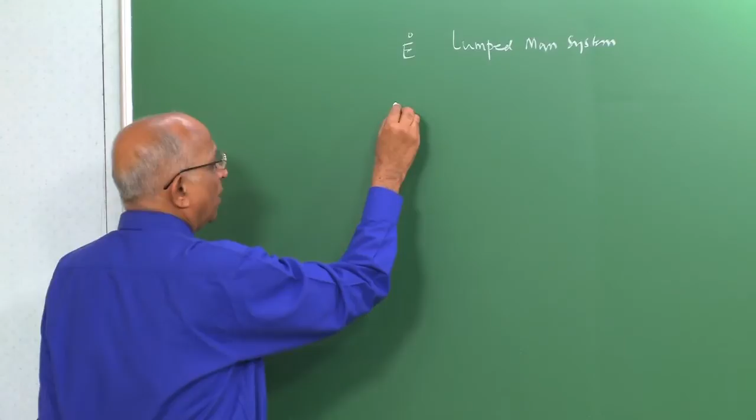In this context, let us restate what we have been saying all along. In the lumped mass system, we said the temperature is uniform throughout, concentration is uniform throughout. We assume all events to occur uniformly in the spatial domain at all times. Well, this just may not be possible.

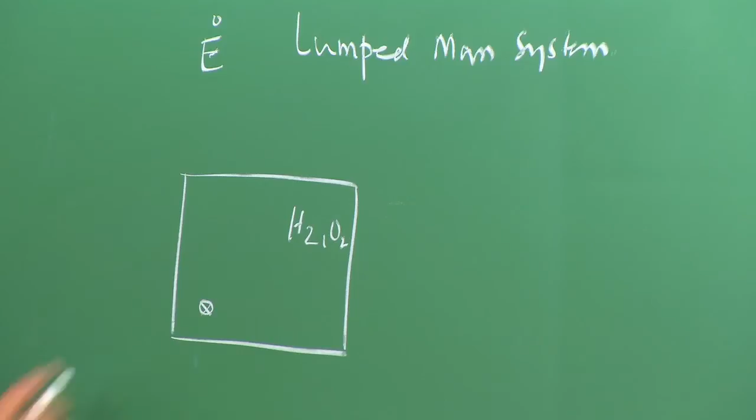We again go back to this example of a hydrogen-oxygen mixture. Let it be at a pressure of 1 atmosphere, initial temperature around 300 Kelvin, and I deposit some electrical spark or some energy in this particular small volume. It is not that the entire volume is going to explode like what we assumed in the lumped mass system, but from this source of energy released, this energy heats up the neighboring volume, and so on. A zone of chemical reactions propagates out.

Let us take a small look at this. Let us expand this particular portion and sketch it. In other words, I have a small volume, now shown magnified, in which I deposit some energy, corresponding to an electrical spark or some resistance heating, or a matchstick I put over here to heat the gases.

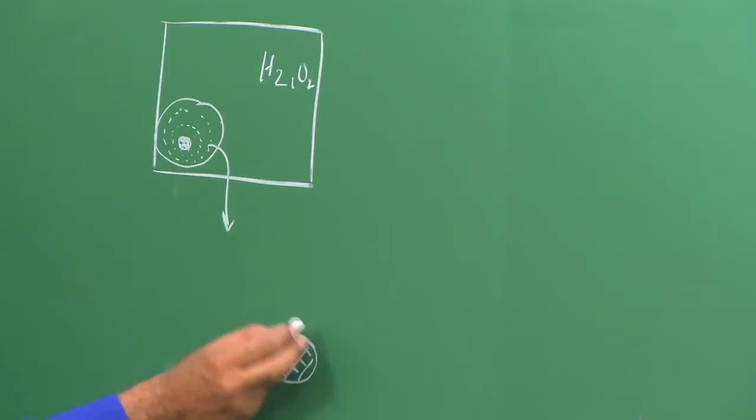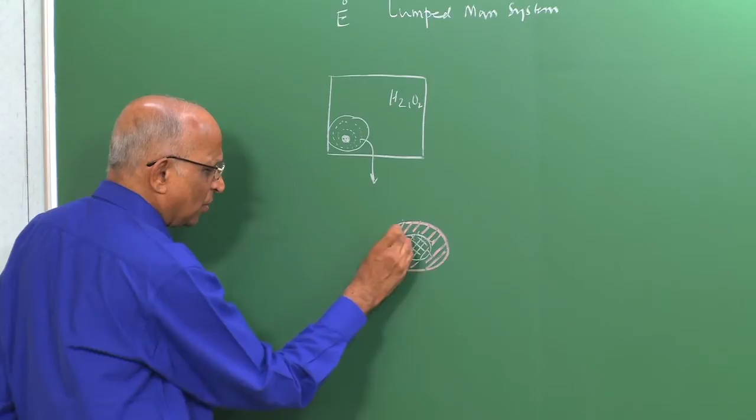What happens? The moment this volume gets hot, chemical reactions take place and the temperature goes up further. This gas heats up the neighboring gas around it. In a zone which I now show in pink, the neighboring gas gets heated by the chemical reactions and heat generated in this small volume, and the heat and concentration diffuse out, causing a chemical reaction in the adjacent layer.

And now what further happens? This adjacent layer, which is hot and undergoes chemical reactions, heats up the next layer. The adjacent layer to the one previously heated now gets heated by heat transfer, conduction or convection from this pink zone, and chemical reactions occur in this particular zone, which thereafter further heats up the layer around it, and so on.

So what is happening? This zone heats up the zone adjacent to it, and in this way, from this initial zone of heat release, chemical reactions occur because of heating. It causes chemical reactions in the next layer, and the next, and so on. You have chemical reactions propagating out from this zone of heat release, till it fills the mixture.

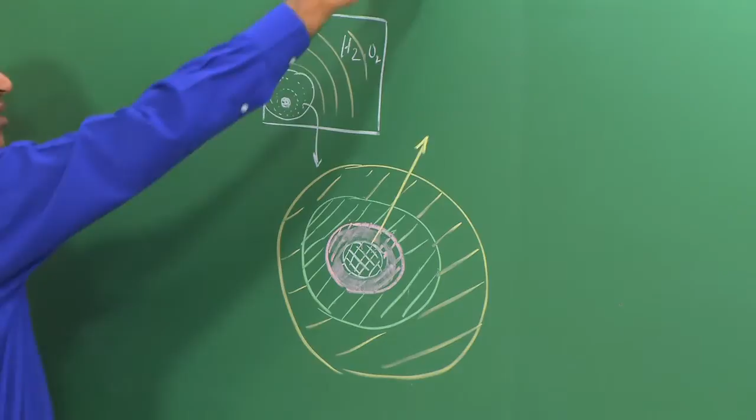Therefore, it is not that instantaneously, as assumed in the lumped mass system, everything is uniform, but it is going to take some time for it to propagate out. This is point one. Point two: let us take a look at the energy release itself.

Suppose this volume is very small, and the amount of chemical reactions it produces is small, such that when it heats the next layer, it apparently is going to get cool because the heat passes on to the next. This hot zone becomes cool if the volume is insufficient, or if the amount of energy or chemical reactions here is insufficient to maintain its temperature as it heats the next layer. What is going to happen?

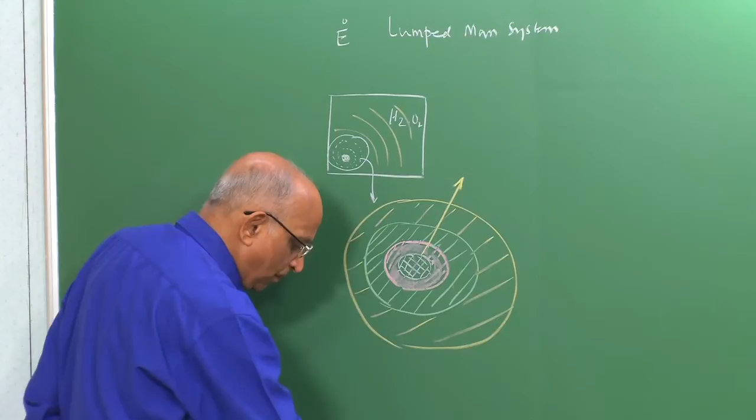This initial volume, shown something like this, the amount of heat in it will collapse, or the temperature will decrease, chemical reactions will decrease, and by the time the neighboring element gets heated up, it is inadequate to heat the neighboring element and it collapses. Therefore, the spark or the chemical reaction collapses, and I can no longer get combustion occurring in the neighboring layer. So we say, if I use a spark for igniting a mixture, unless I have an adequate quantity of this particular volume, or let us say by volume I mean something like a kernel, something like a seed.

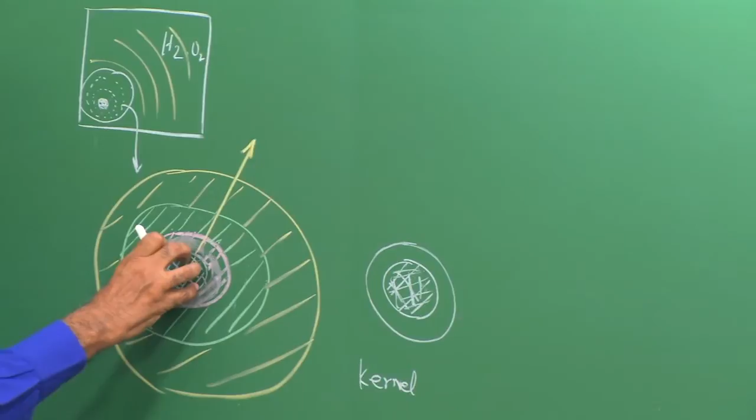If I do not have an adequate kernel for ignition, the ignition kernel will collapse and it will not be possible for it to heat the adjacent layers. Therefore, from the ignition point of view, it is necessary to make sure that the size of the ignition kernel exceeds some threshold value, and this is what I want to do.

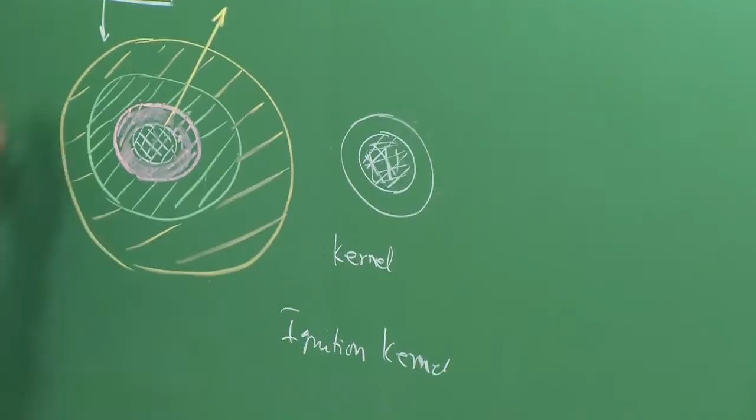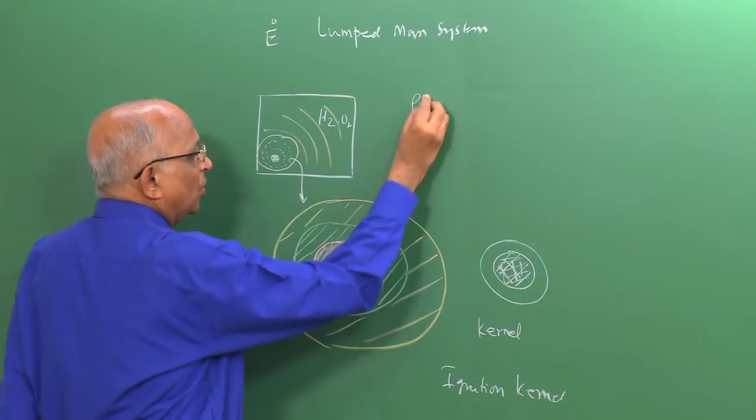I want to find out, since I am not heating the whole thing, that I don't need the total mass in this system, which is rho times volume times specific heat times the high temperature (the burn gas temperature minus the initial value, where the initial temperature is the same as ambient). I don't need to supply that amount of heat, I just need to supply the heat required to form an ignition kernel which can heat the succeeding layers.

This allows the combustion wave to propagate out. But to find the critical size of the ignition kernel, and therefore ignite the gases and have a flame moving out, it is necessary to get some idea of the rate or speed with which the combustion wave moves. What do you mean by combustion wave? It's the zone of the reacting gases, and in that zone the temperature increases. We need the speed at which this zone moves out, the thickness of these zones, and some more definitions before I can determine the ignition - and this is what I do today.

Having specified the problem, let us see how to go about it. Let us first ask: what is the speed at which the combustion zone propagates out? That means the speed at which the chemical reactions are going forward. To do that, let us forget about curvatures for now.

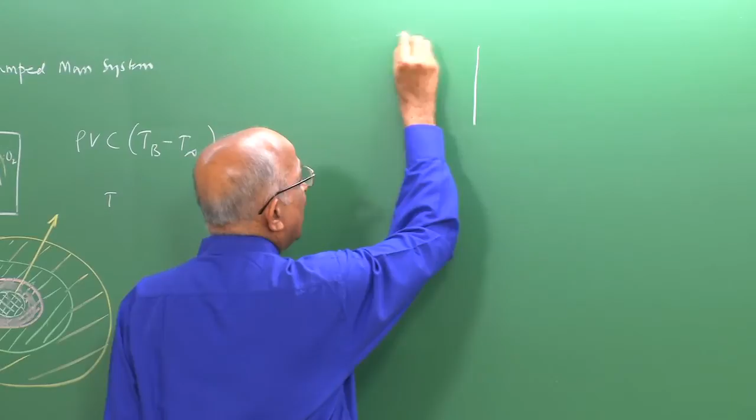Let us say I have a zone of combustion - a pipe or some particular medium in which I have the unburned gases. The unburned gases are at density rho, which is unburned, at a temperature Tu (the unburned gas mixture), and the pressure of the unburned gases is Pu. Into this unburned gas mixture, a combustion wave, or zone of reaction, propagates.

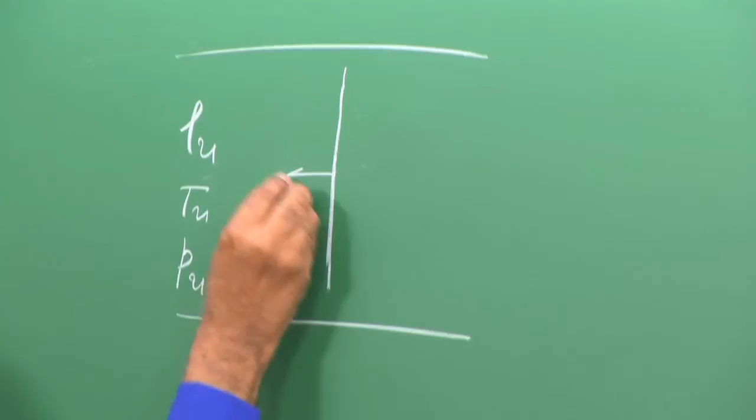Let this zone of combustion, which I now say is planar, propagate at a speed S meters per second into the unburned gases - therefore I can say it propagates at a speed Su meters per second.

What happens behind the combustion front which moves into this? Well, the gases burn behind it, chemical reactions take place, and the density, temperature, and pressure now correspond to the burned gases. So the suffix B for pressure, temperature and density corresponds to burned gases, and the suffix U corresponds to unburned gases.

This is the problem, and I want to determine the speed at which the combustion wave propagates into this medium. As we did before with waves propagating into a medium, to look at the problem with a wave propagating and things moving, when the wave propagates I should have some velocity within the medium - let's say U in the burned gases behind the wave, which is moving at Su.

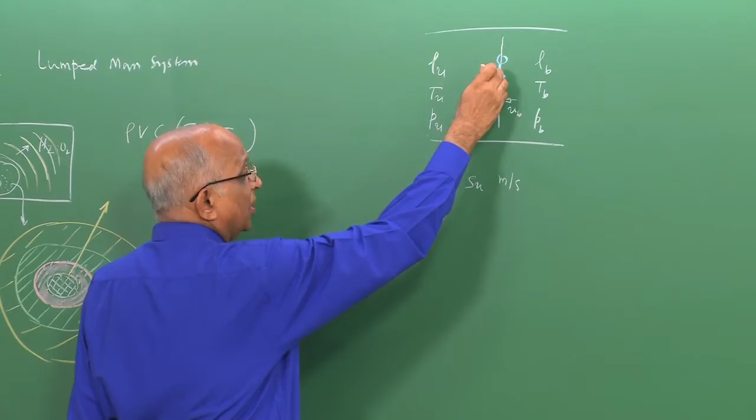It is somewhat difficult to handle this way, so the easiest method is to effect a coordinate transformation such that I imagine I sit on the wave, or stand on the wave itself. That means I look at this problem in the context of the wave being stationary - I sit on the wave and watch the show. If I do that, what do I get?

Well, I have the same problem now - the wave front is here, but since I am on the wave, in the frame of reference of the wave itself (the combustion wave, or combustion front, moving into the unburned medium), the unburned gases at density rho u, temperature Tu, and pressure Pu move towards me - that is, towards the wave in the frame of reference of the combustion front - at a speed Su.

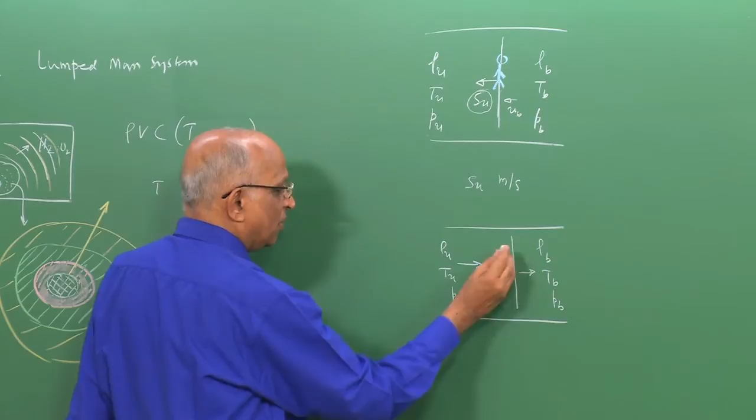Let us assume behind the wave I have rho b, Tb, the temperature of the burned gases, and the pressure of the burned gases. In the frame of reference of the wave, let the velocity be Sb. Well, what am I interested in? I am interested in determining the value of Su. The problem is posed: behind the combustion disturbance which moves, I have these values, and these are the values upstream.

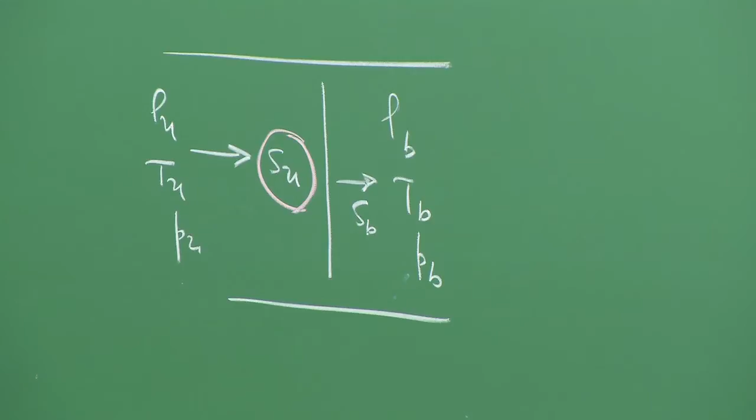But can I picture what is really happening in this wave? What is this combustion front or zone of combustion that we said is moving? We said something gets heated, there is diffusion of heat and diffusion of concentration which causes the adjacent layer to react, and the same thing happens again. This causes the adjacent layer to react, meaning more and more of the unburned gas comes in and gets heated.

Can I expand this out? Can I have a mental picture of what is going to happen? That is what we call a mind model. I want to have a mind model of what is happening in this particular front. Therefore, let us try to devise what would happen.

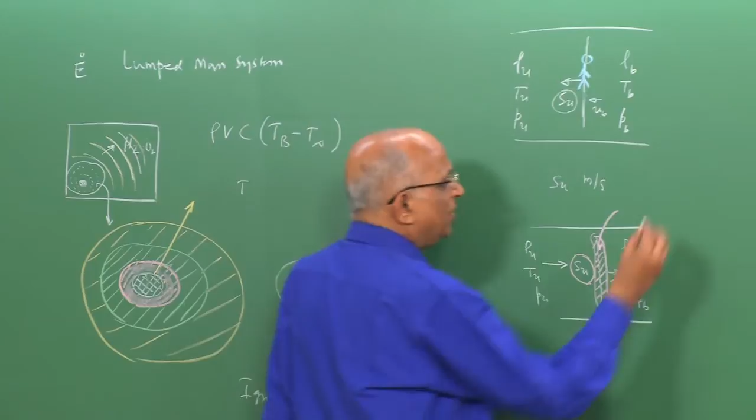We say the unburned gases are moving, so initially I have the unburned gases at a temperature Tu, and what happens? At the exit I have all burned gases. Now let us expand it out and give it some thickness. Initially the temperature is Tu on the left hand side, and on the right hand side the temperature is Tb. What is going to happen?

Into this line, what is happening? I have rho u at speed Su, which is the mass flux entering this zone. The moment it enters at temperature Tu, it encounters the hot products of combustion on the right hand side, so it gets heated and the temperature begins to increase.

The temperature begins to increase, and where does it end up? Ultimately the temperature should be Tb, corresponding to the right hand side. So the temperature T of the unburned gases increases from Tu to a level where chemical reactions begin to take place. Once chemical reactions begin, they occur fairly fast, so the temperature reaches Tb. This is the way temperature changes from the unburned gas temperature Tu to the burned gas temperature Tb.

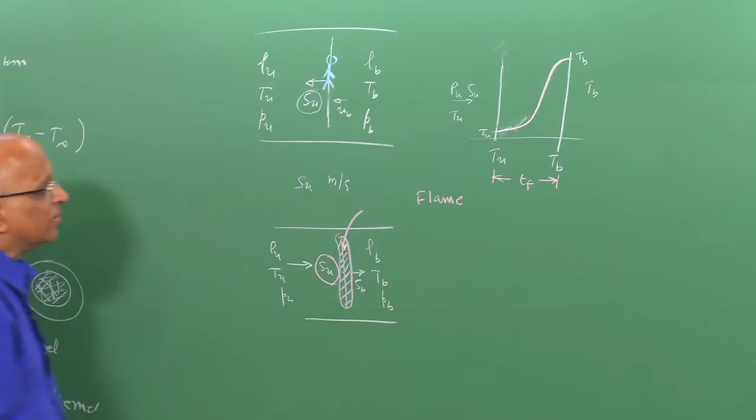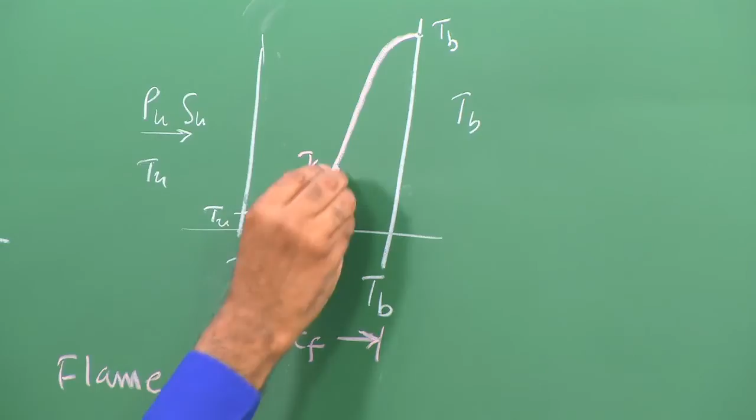Using what we learned from the lumped mass system, we said that when the activation energy for most substances is high, initially there is something like a preheat zone where the temperature increases to some value, let's say Tc. That is the zone in which the cold gases are heated to a particular temperature, which we call preheat. Once it has been heated to the critical temperature, the auto-ignition temperature, there is a spurt in chemical reactions and the temperature shoots up like this.

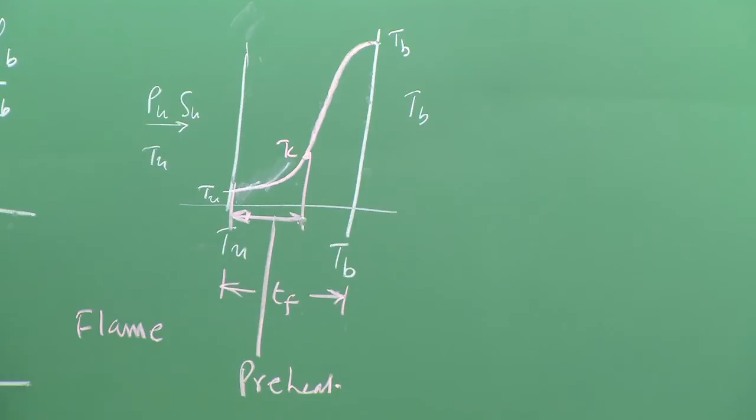So initially there is something like a preheat zone followed by chemical reactions over this length, and now I can add more detail. This is my zone of chemical reactions, fast chemical reactions, which I call L. So the thickness of the flame is Tf, my zone of chemical reactions is L, and now can I write an equation for this particular phenomenon?

This is the zone of active heat release, and this is the zone in which heat is getting received, such that the temperature goes from Tu to Tc. We are talking of a zone in which heat is getting released, and this heat gets transferred into this zone such that it is able to increase the temperature from Tu to Tc.

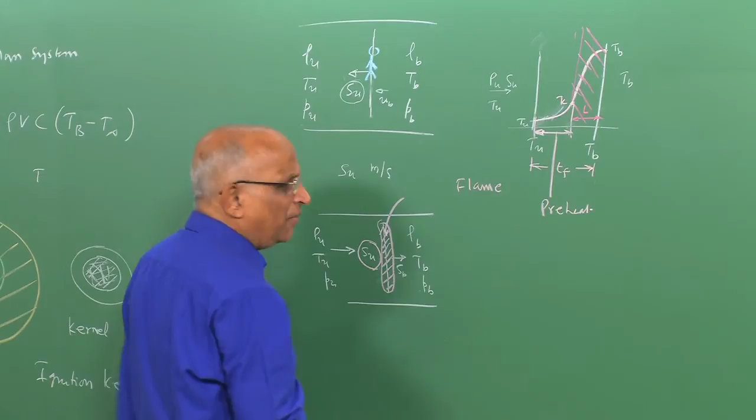This zone, the preheat zone, receives heat. You will observe whenever we receive something, we put our hand out like this, whereas when you give something, you give it like this. So you receive something over here, and give something over here. The point of contact between receiving and giving is what we call the inflection point.

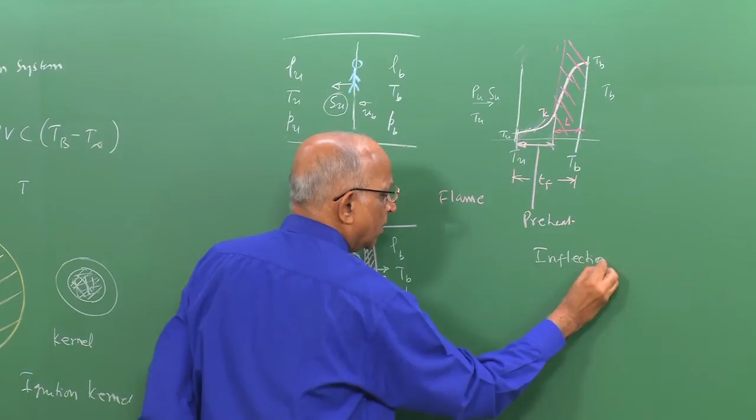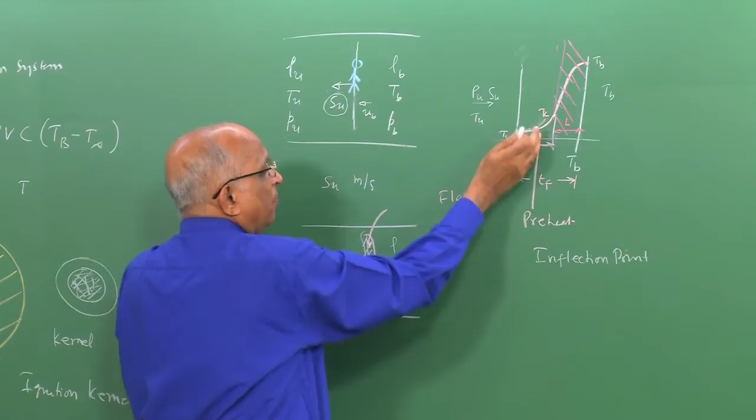The inflection point is a point at which the curve is concave downwards in this particular zone, because it is giving - it is convex upwards or concave downwards - and what it is receiving is concave upwards or convex downwards. So the concave downwards is getting replaced by concave upwards, and that is the inflection point.

That is, at the inflection point there is a sign change in d by dx of dT by dx, wherein x is the distance, and therefore there is a change in the curvature. That is the inflection point.

Rather than carry the concept of critical temperature or autoignition temperature from the lumped mass system, I say the temperature here is the inflection temperature, which is the junction or point at which the heat received from the hot zone is received, and this is what is given. I have the inflection point over here.

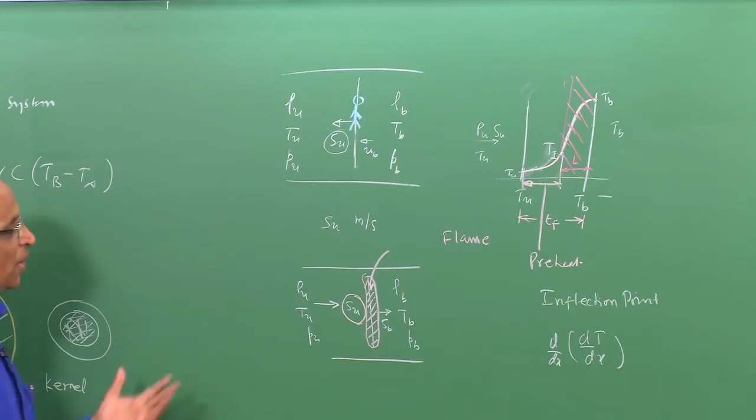Now I know the events occurring along this line, which is what I have sketched. I want to write an equation for it. What is the equation? I have to write the heat balance equations.

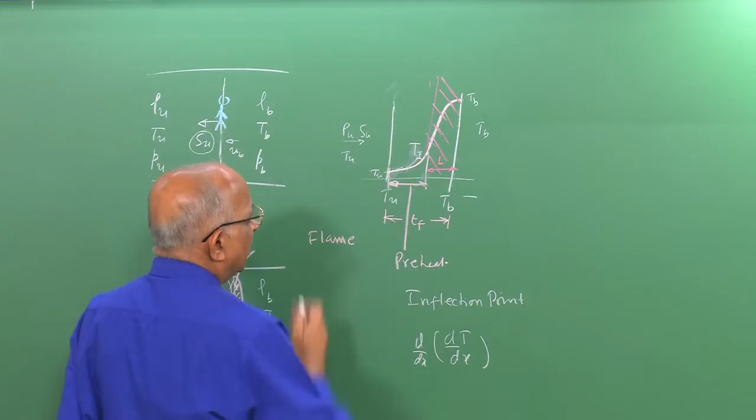Let's write it out. I say rho u Su is the mass flux which is coming. To write the equation, let us assume the area we are considering is unity, 1 meter square. So the mass entering is rho u into Su into 1, that is the mass flux into 1, which is the mass entering.

Let us for the present assume it's at constant pressure Cp. We will ratify this assumption a little later. Therefore this is the thermal mass over here, and what happens in this zone?

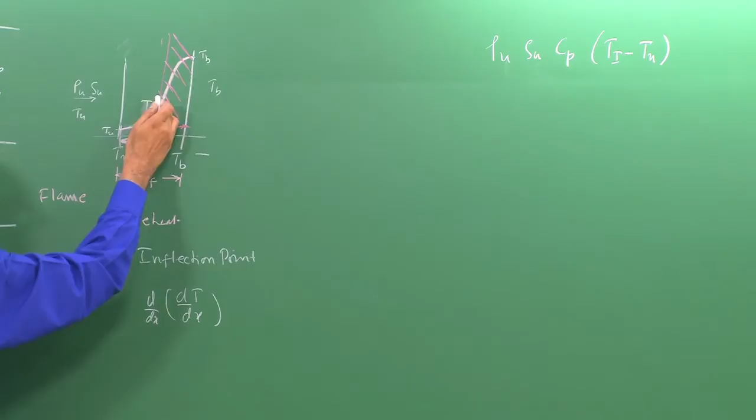The temperature increases from Tu to Ti in the preheat zone. This is the heat which is getting received over here. And how does it receive the heat? Well, I should have something like a gradient in temperature. It is this gradient which gives the heat.

This is equal to, again per unit area, the thermal conductivity K into the gradient dT by dx at this particular point, which I can approximate as a straight line and write as Tb minus Tu by the zone length over here - we said this is the length of the combustion or reaction zone. So Tb minus Ti by L is the gradient, and K into this is the heat flux. This becomes my equation 1 for heat transfer.

Now that I have put it down, my aim, as we said, is to determine the value of Su. But can I explicitly get an expression for Tb minus Tu? I know the initial temperature, but I do not know the inflection temperature. If I can somehow get this - here it should not have been Tu, because what am I saying? Tb minus Ti divided by length is the gradient. So it should have been Tb minus Ti, and here it is Ti minus Tu - that is the temperature increase.

Therefore, if I have to determine this, I know the amount of heat generated in this particular zone. What did we say?

The heat generated can be written as the rate of chemical reaction, so much moles per cc per second, multiplied by the volume, so much cc, multiplied by the heat generated per mole, Q, so much joules or kilojoules per mole. This gives the value in joules per second, because mole and mole get cancelled, cc gets cancelled, and I have joules per second.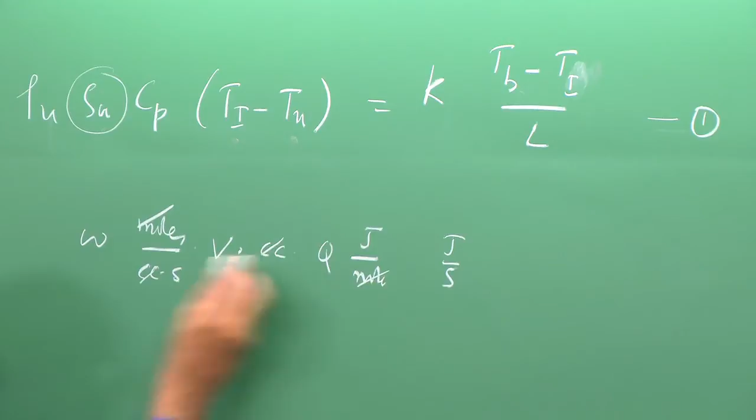This is the amount of heat, and since I am considering unit area, the heat generated is omega, the rate of the reaction, into V, which corresponds to the length L, which corresponds to the volume, into Q. Now, what does this heat do?

This heat acts on the mass flux. The mass flux coming in is the same throughout, so I have rho u into Su into Cp. What does it do? It increases the temperature from the initial value to Tb, the burned gas temperature.

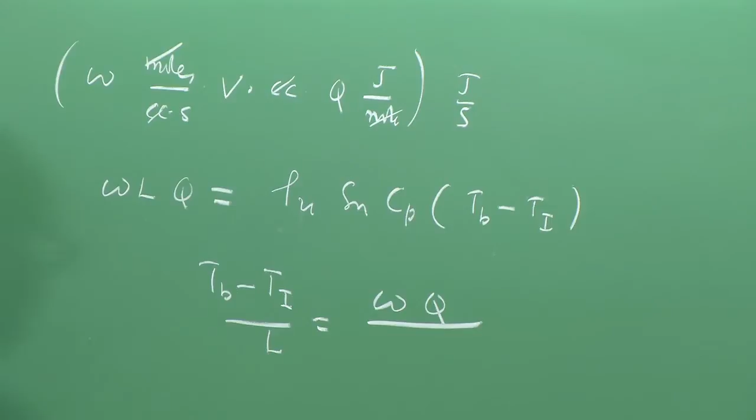The mass flux of gases is rho u Su, considering unit area, into specific heat into change in temperature. From this I get the value of Tb minus the inflection point temperature Ti, divided by L, equal to omega into the heat release Q, divided by rho u Su into Cp. This becomes my equation 2, based on the heat release which is equation 1.

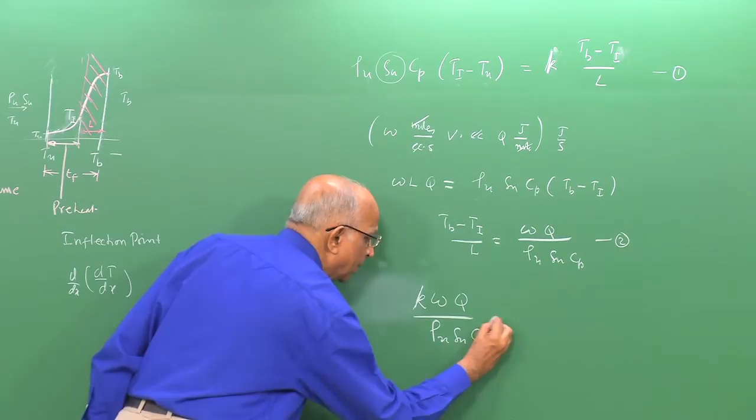Now I want to find the value of Su. Solving this, I get rho u squared Su squared Cp squared into Ti minus Tu. I move the denominator to this side.

This is equal to k, the thermal conductivity, into the rate of reaction in moles per cc per second, into the energy generated in the reaction in joules per mole. Therefore Su squared equals 1 over rho u squared Cp squared, into k omega Q in the numerator, divided by Ti minus Tu. So the flame speed, in meters per second, equals 1 over rho u into Cp into the square root of k omega Q divided by Ti minus Tu.

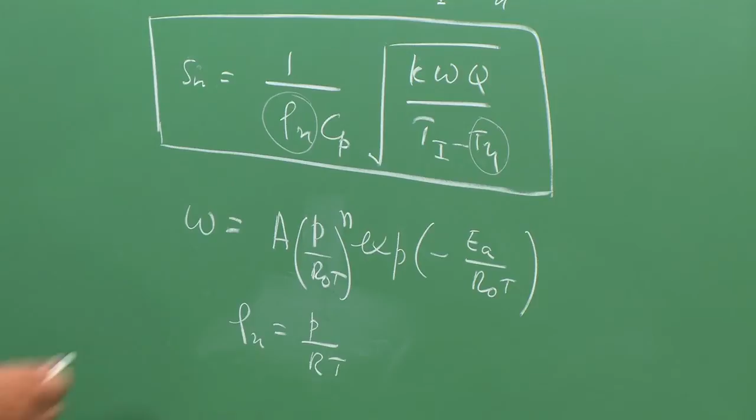I also know well the density of the gases. I can write Pv equals mRT or whatsoever, and I get the value of rho as equal to the initial pressure divided by specific gas constant into temperature. Mind you, this is the universal gas constant R naught, joules per mole Kelvin, while this is the specific gas constant in joules per kilogram Kelvin. So when I look at this, I get omega to the power half.

That means I get P to the power n by 2. I get the flame speed SU goes as P to the power n by 2 minus 1, because here I get P to the power 1, and under the root sign, P to the power n by 2 minus value of 1. Mind you, most of the chemical reactions we consider have n equal to 2, so the flame speed goes as P to the power 0 - it is independent of pressure.

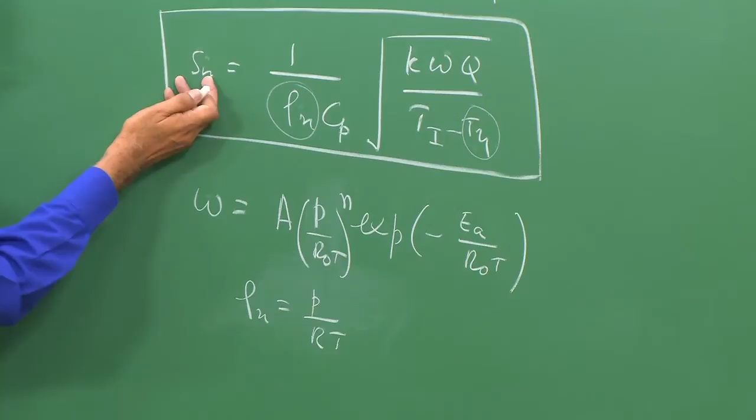If it is independent of pressure, the speed with which a combustion front moves into the unburned gas medium is independent of pressure, increases with increase in temperature of the unburned gases, increases with the amount of heat release, increases with conductivity, and so on. We have these particular relations, so let us try to get some feel for the speed.

Is it 1 meter per second? Is it 100 meters per second? To be able to answer that, let's put the values down, as people have done, and see what values of flame speed we get. So I quickly go through a few cases, maybe 2 or 3 gases, to get a feel for the speed with which combustion moves into the unburned gases.

Let me give these values. Let us say methane-air, considering stoichiometry, meaning equivalence ratio is 1. At this equivalence ratio, the value of SU is something like 0.5 meters per second.

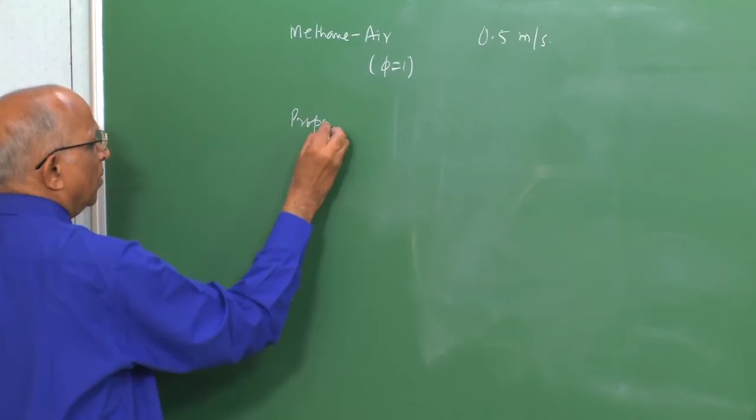If instead of methane I jump to propane-air, again at the same stoichiometric mixture, phi equal to 1, I get 0.46 meters per second. If I go to butane-air, C4H10 mixed with air in stoichiometric proportion, the value is 0.4 meters per second.

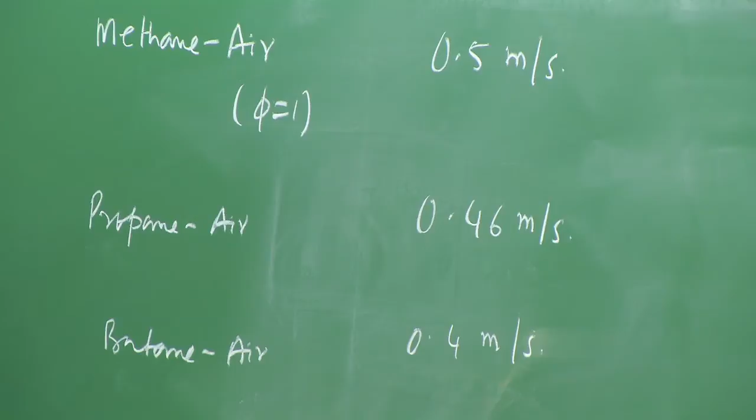Therefore, for these alkanes the speed is around 0.5 meters per second. Mind you, it is quite slow. If I have a fire coming forward, the inference is I can run much faster, and therefore save my skin from the fire which propagates out from an ignition source.

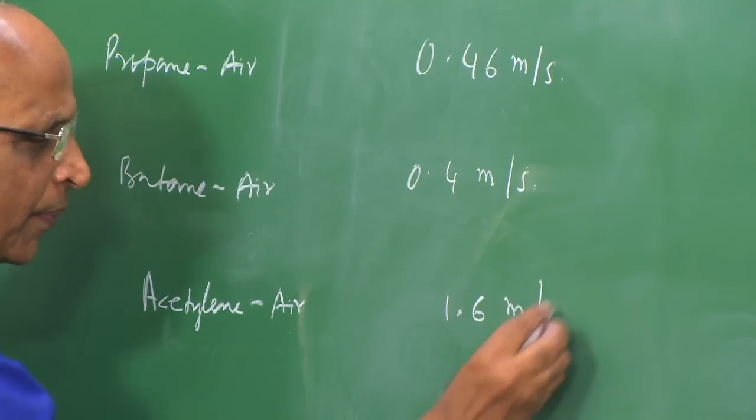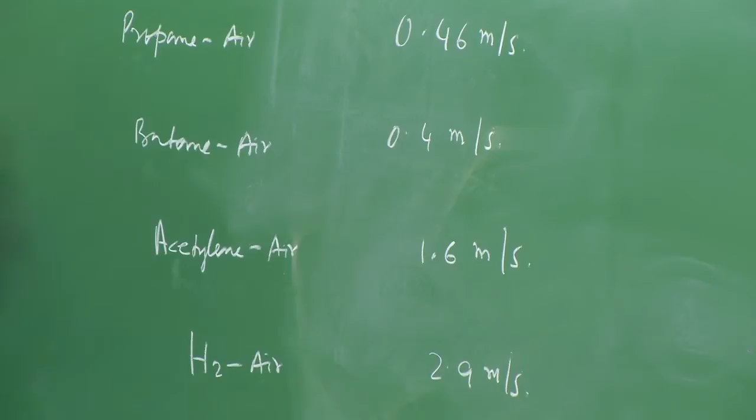Let us put down one or two more values. Let me put down the value for acetylene - since acetylene has higher energetics, it has a value of 1.6 meters per second. And for the last one, hydrogen-air system, the speed is around 2.9 meters per second. Hydrogen is a very light gas, so the value of rho u in the denominator is small, and the speed is higher.

Well, these are about the speeds, so we have accomplished something now. We are now able to find out, if I have a gas mixture and I ignite it, and I have a combustion wave that I'm able to create, I am able to find out the speed at which this combustion front propagates out.

When I say combustion front propagates out, if we look at textbooks on explosions or combustion, people talk in terms of flame velocity. Is flame velocity the same as the combustion front which moves, or the value of SU, which is the velocity with which the unburned gases are moving towards the front - is it the same as the flame velocity?

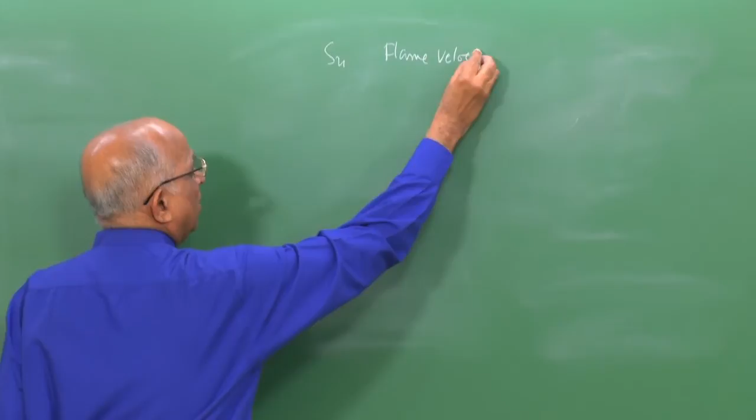Let us go back and look at a particular experiment. Let us say I have a tube in which gases are present, and then I ignite the gases and form a flame, and this flame moves out at a given velocity. Now, when the observer is standing outside, a stationary observer, he watches the flame go by and he defines this as the flame velocity.

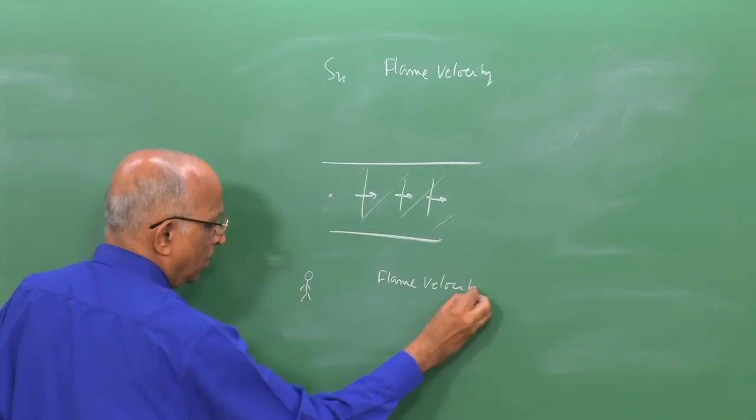Now, what did we tell ourselves when I talked in terms of the speed SU, what did I presume? I said I am standing on the combustion front and looking at the speed with which SU is coming towards me. Therefore, SU equals flame velocity only when the gas ahead of the flame is stationary. I presume here that it is stationary, and therefore I calculate this.

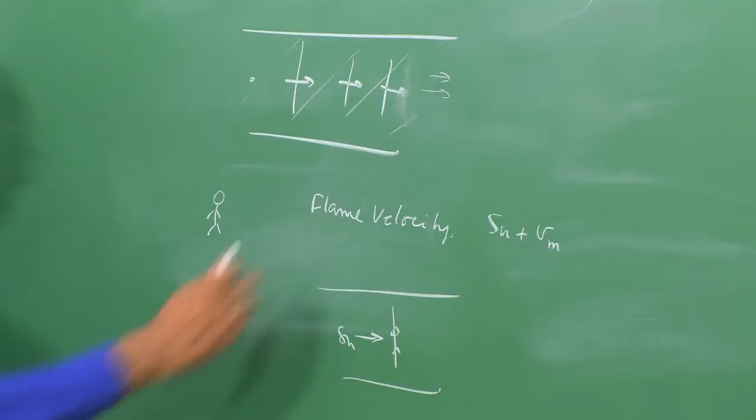But if the unburned gas is also moving at some velocity, what is perceived as flame velocity is much higher, because it is with reference to that motion. Therefore, flame velocity equals the unburned gas velocity plus the velocity of the medium in the direction the flame propagates. We will do some problems involving flame velocity to clarify this concept further. Now we say, well, I know the speed with which a flame or combustion wave propagates, which I call the unburned gas velocity.

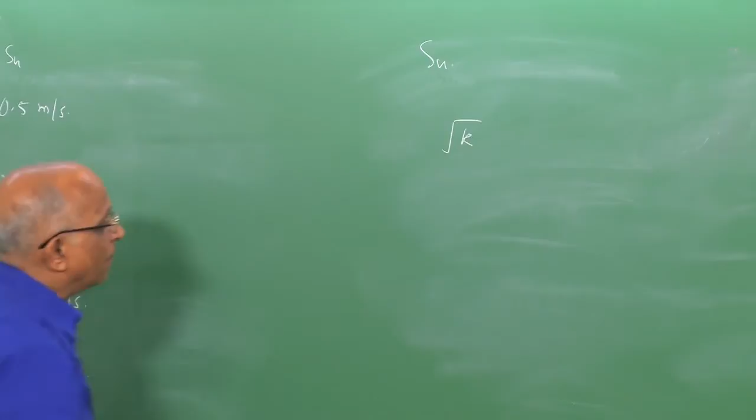If I say unburned gas velocity, we also found it was proportional to the square root of k, the thermal conductivity. Whenever something is moving, heat transfer can occur not only by conduction but also by convection, especially if something is very turbulent. In that case, I could have an equivalent conductivity which is much higher. Therefore, the SU I have developed so far, based on this mind model, is only good for the laminar case, in which heat transport is by molecular conductivity k.

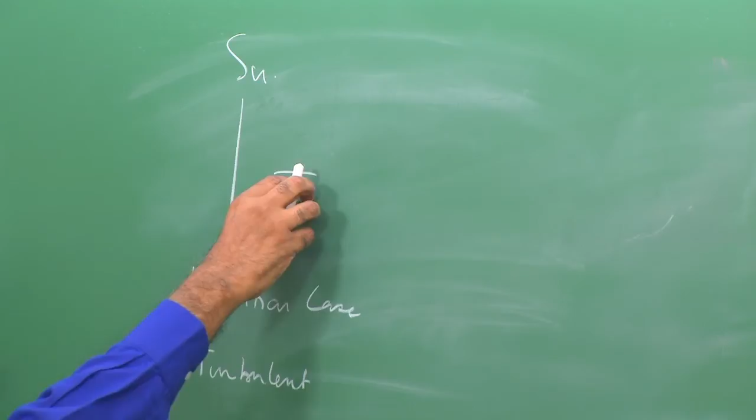If it is turbulent, I can use similar expressions, but I must account for eddies which increase the effective thermal conductivity. So the flame can move at turbulent speeds, which I call ST, compared to SU. Turbulent flame speeds are generally 10 to 100 times faster, because the transport of heat from the ignition source into succeeding layers is much higher, and the diffusion transport of concentrations is much higher too, so turbulent burning velocities are much higher.

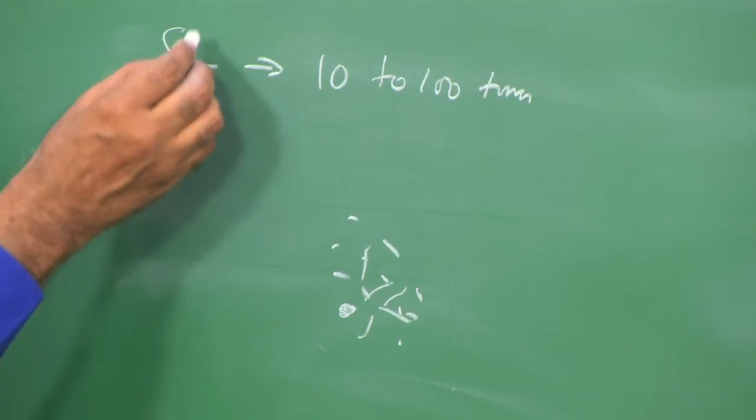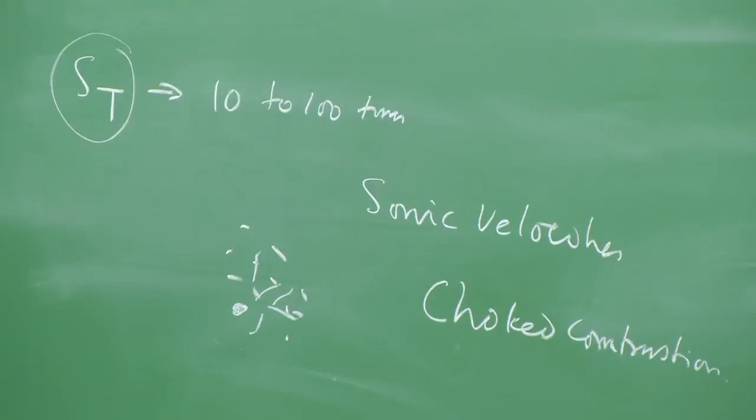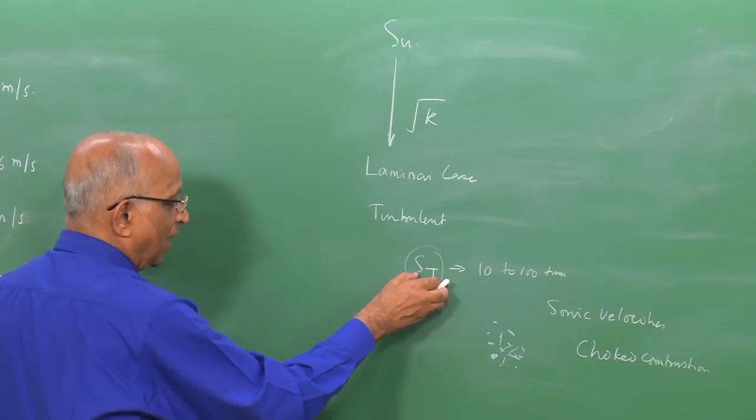In fact, maybe towards the end of the course, or in another 5 or 6 classes, we will see that turbulent velocities can reach something like sonic velocities, which we'll sometimes refer to as choked burning or choked combustion, because sonic corresponds to choking. Anyway, let us come back. It is possible to have turbulent propagation of the burning gases, and when that happens, we have turbulent speeds at which it goes.

With this background on speed of propagation, can I go back and find the thickness of my flame? Let us not lose track of the problem: I have a particular volume and want to find the critical ignition kernel such that a flame propagates out. We now know SU, and ST will be much larger than SU. Can I also find the thickness of the flame which propagates out, because that will help with this problem? Therefore, I am interested in the thickness of the flame.

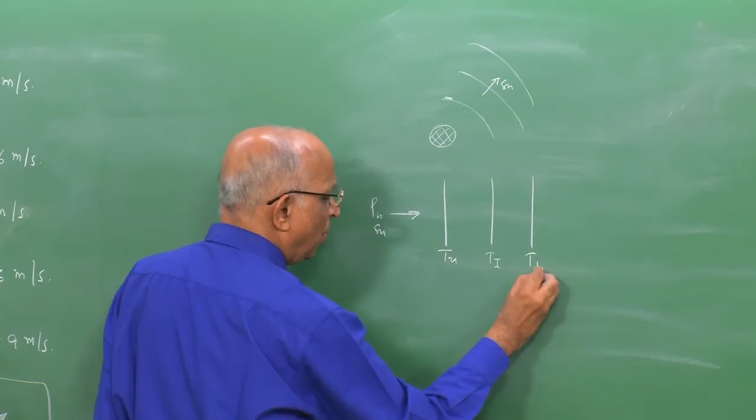Let us again put up the diagram of the flame as we looked at it earlier. Rho u times SU comes here, and temperature increases from Tu to an initial value Ti, then to the burned gas value Tb. This is the zone of length L where chemical reactions occur, and this is the zone where preheat takes place. If I plot the temperature distribution, it looks something like this, with an inflection point at Ti. The scale here is for temperature: Tb here, and Tu over here.

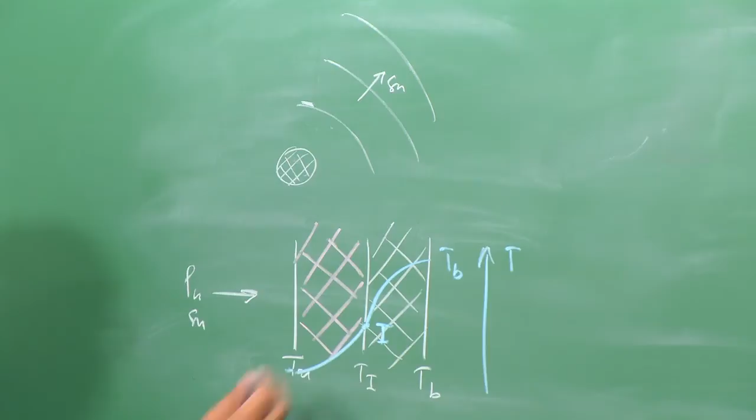This is the type of progression, what do you find? Now, if I were to get the thickness of the flame, I am looking at the thickness of the flame to be over here, the thickness of the combustion front Tf. I want to get an expression for it.

In a similar way, I just put down the values. The heat transferred, let's put it down here. I have rho u into Su, which is the mass flux coming in. I'm interested in the total, therefore I have Cp into Tb minus Tu, which is the total.

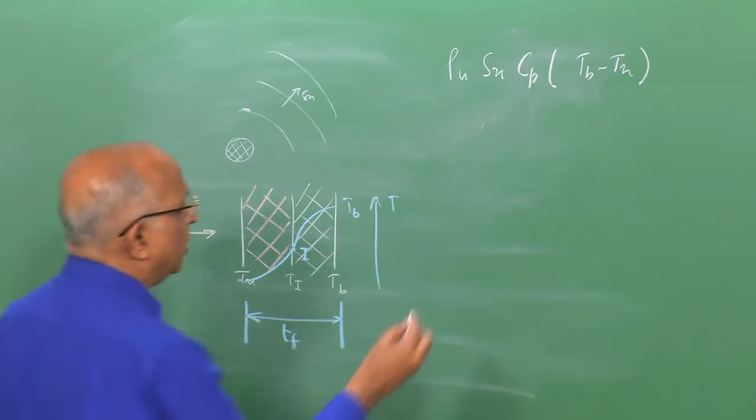This is the total heat being generated, and this heat is what is available here. Therefore, the total heat is equal to the heat generated, which equals Tf into omega into Q. But the heat generated is also the heat conducted away. I can write it as K into the gradient, assumed to be Tb minus Tu, and the thickness of the flame front as Tf.

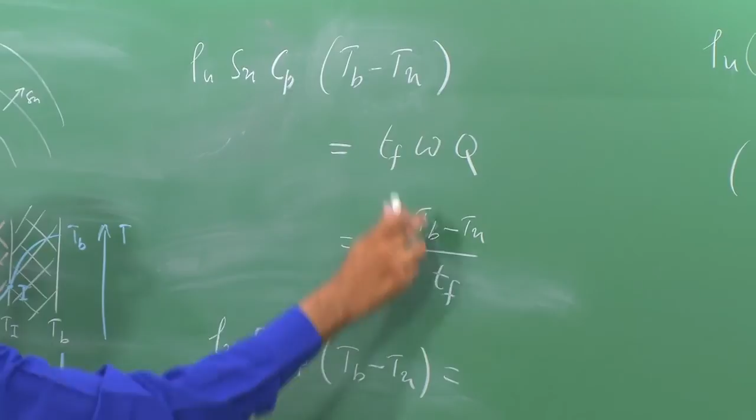I get the value of rho u into Su into Cp into Tb minus Tu equal to the thermal conductivity K into Tb minus Tu divided by Tf. On the left hand side I have Tb minus Tu, on the right hand side I have Tb minus Tu, so I can knock it off. This gives the thickness of the flame, small Tf.

Tf is equal to, bringing rho u Su Cp to this side, I get the expression for the thickness of the flame to be K divided by rho u Su into Cp.

Now this is the thickness of the flame, but we must get an idea of the thickness. Is it 0.1 mm, 1 meter, 1 centimeter? Let us take a look at this expression. When I say K over rho Cp, we call it thermal diffusivity alpha. What does thermal diffusivity represent? It says how much heat is in a given substance, and out of this heat content, how much gets diffused out by conduction.

That is the rate at which heat leaves the inertia of a system, compared to how much heat is contained within the system. That means how much heat gets diffused out of the system, we call it alpha, K by rho Cp as alpha. If you look at the unit of thermal diffusivity, we have the unit of thermal conductivity.

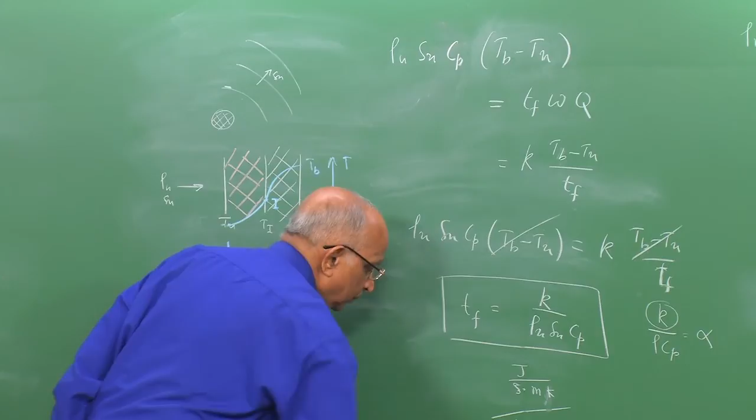What is conductivity? Watts per meter Kelvin, that is joules per second by meter Kelvin, divided by rho, which is kilogram per meter cube density, and specific heat, joules per kilogram Kelvin. Kilogram gets cancelled, joule gets cancelled, meter cube and meter square come in the numerator, leaving a second. The unit of thermal diffusivity is meter square per second.

Therefore, I can also write the value of the flame thickness Tf as equal to thermal diffusivity divided by the flame speed. We already saw Su is typically around 0.5 meters per second for hydrocarbon air mixtures. The thermal diffusivity of most gases at atmospheric pressure is typically around 0.5 into 10 to the power minus 4, of that order, with units of meter square per second.

The value of Su is 0.5, so many meters per second. Therefore, the thickness of the flame is so much, the unit is all right, and we say the thickness of the flame is typically around 10 to the power minus 4 meters, which is around 0.1 millimeter.

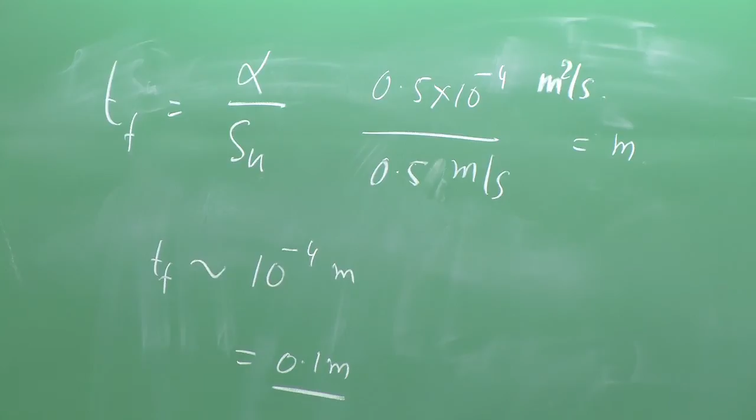The thickness of this combustion zone, which consists of the preheat zone and the zone of chemical reactions, is only of the order of 0.1 millimeter, since it is 10 to the power minus 4 meter. Therefore, we can also say it is as good as a wave, the flame is so thin that it progresses as a wave. Therefore, we have two expressions now: we derived an expression for the flame speed Su.

We also derived an expression for the flame thickness Tf. I would like to use these two to find out how much energy is required to ignite a kernel of a given size, if I do not use the lumped mass system. But before that, one last derivation regarding the combustion wave: what is the pressure generated behind a combustion front? If this is clear, I can go back and justify some of the things I've been doing today, and have an idea of how to model my required ignition energy and kernel size, and proceed further with combustion waves.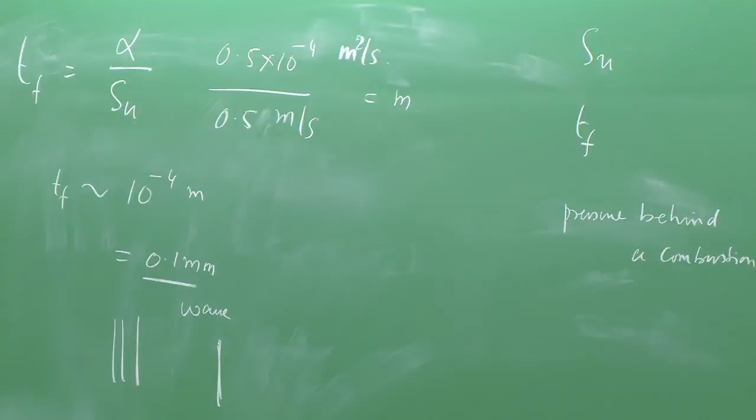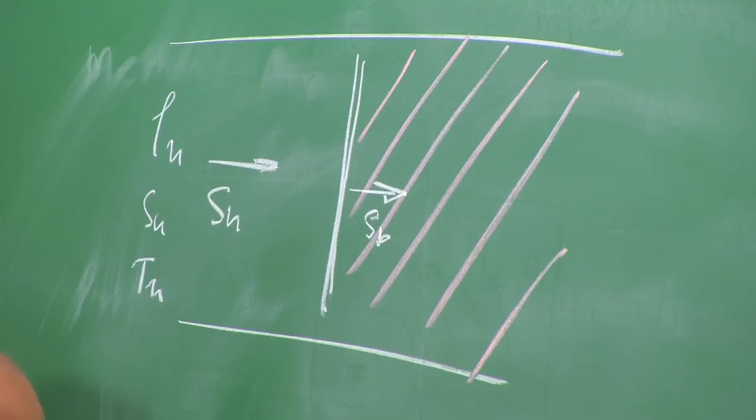So I'm looking at this: I have a flame of thickness Tf, with something moving here at speed Su towards the front, which is rho u, Su, at temperature Tu. On the right hand side I have the burned gases, and the combustion front moves into the unburned gases, or the gases move towards the combustion front, which is stationary because we consider Su with reference to an observer sitting on the wave, that is, with respect to the combustion front itself. So gases move at a wave with density rho b, speed Sb, temperature Tb, and pressure Pb.

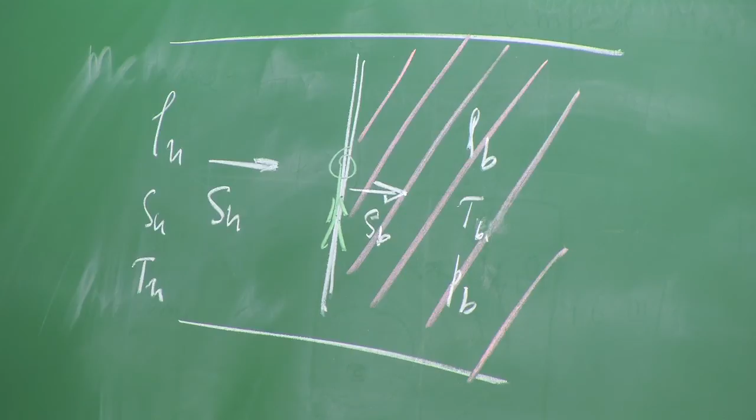If I write the momentum equation, what do I get? I have pressure upstream equal to Pu, plus the momentum. Considering unit area, the flux movement means area into pressure is the force, and the total mass is rho u into Su per unit area, into Su square. This equals the pressure and momentum on the burned side: Pb plus rho b into Sb square. Therefore, the change in pressure from unburned to burned gases, Pu minus Pb, equals rho b into Sb square minus rho u into Su square.

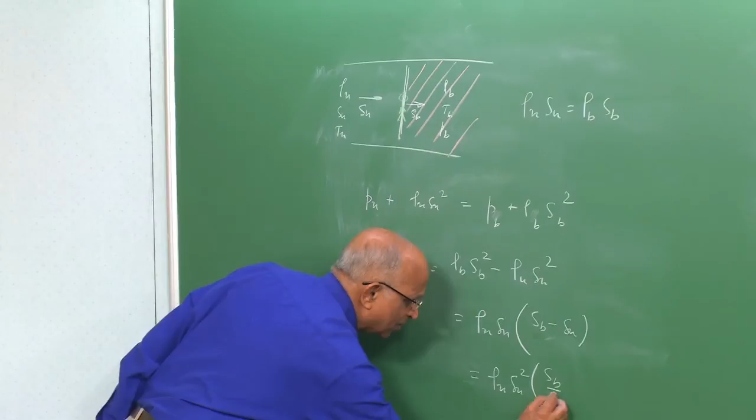From continuity, mass flux entering equals mass flux leaving, so per unit area, rho u into Su equals rho b into Sb. Using this, I can write rho u into Su into Sb minus Su. Taking Su outside, I get rho u into Su square into Sb by Su minus 1. But Sb by Su equals rho u by rho b, so the pressure difference Pu minus Pb equals rho u into Su square into rho u by rho b minus 1.

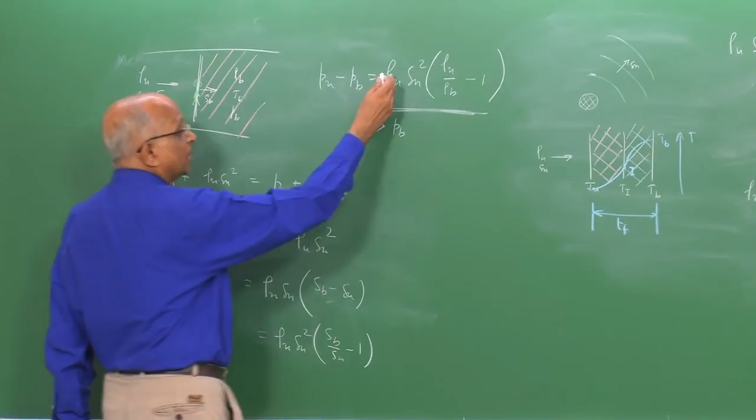The burned gases are at a higher temperature than the unburned gases, so this ratio is greater than 1, meaning Pu is greater than Pb. That means there is a drop in pressure across the combustion front or wave. Let's put down the magnitude for one specific case: the ambient pressure is about 1 atmosphere at 300 Kelvin, so the density rho u is typically around 1.2 kilograms per meter cube, and Su for most hydrocarbon gas mixtures is around 0.5 meters per second.

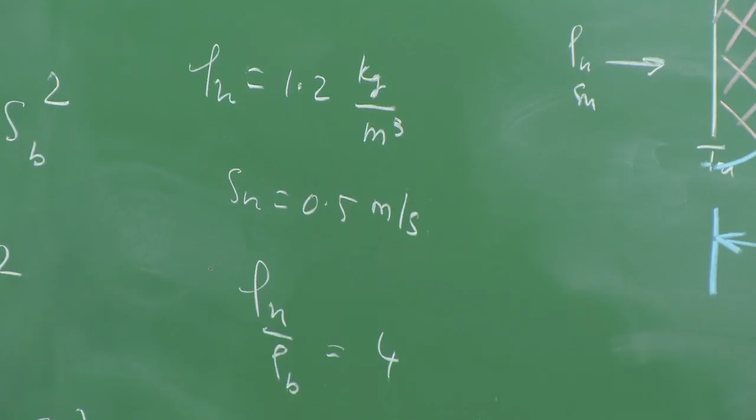The value of rho u by rho b, if the temperature increase is threefold from 300 to 900 or 1000 Kelvin, rho u rho b is equal to something like 4 times the increase in temperature, that is the burnt gas temperature is something like 1200 Kelvin as compared to the initial temperature of 300 Kelvin. If I substitute these values, 1.2 into 0.5 squared into 4 minus 1, I get the typical value. Pu minus Pb comes out to be something like 0.9.

1 Pascal is a very small number. Atmospheric pressure is something like 10 to the power 5 Pascal, and therefore, even though there is a fall in pressure, the fall is very small. Whenever we talk in terms of a combustion front, we talk in terms of a constant pressure process, and that is why we are justified in using the value of Cp while determining the flow properties. That means across a combustion front there is hardly any change in pressure, but there is a drop in pressure, and this drop is somewhat small.

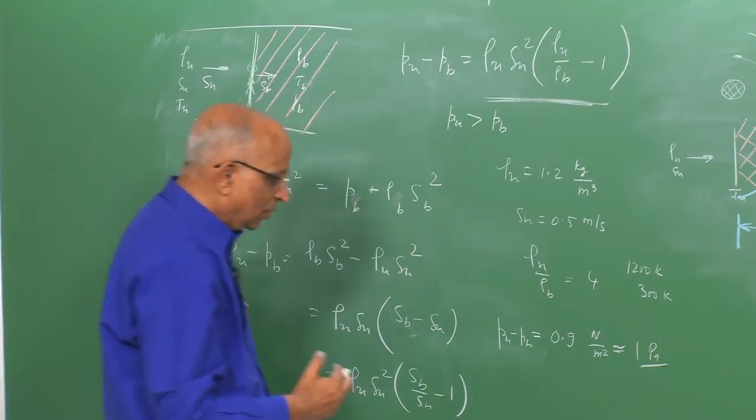So far, what have we done? We learned the following: how to determine the value of the flame speed SU, the unburned gas velocity with which the combustion front moves into the unburned gas medium, which for a stationary medium is same as the flame speed. We also talked in terms of the thickness of the flame, which equals thermal diffusivity divided by the speed of the combustion front, and also the pressure drop across a flame, which is extremely small, but there is a small drop across the front.

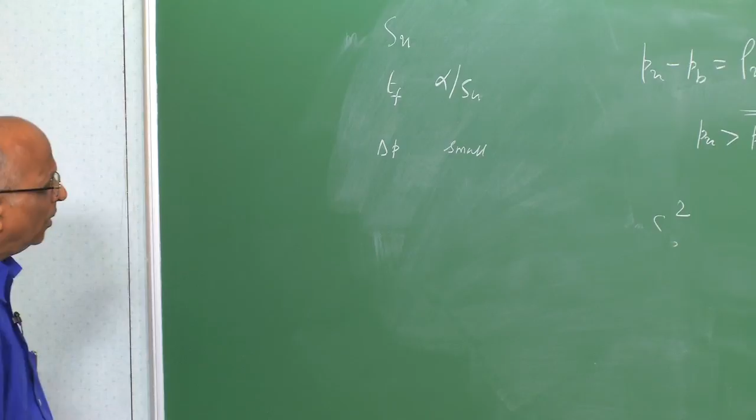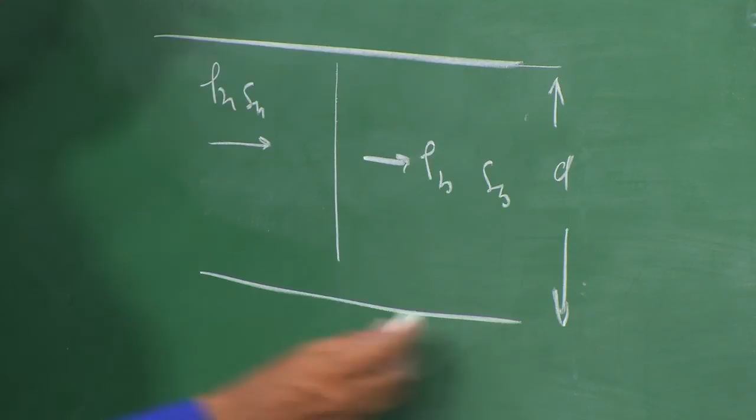Now we want to put these things together to relate how much energy is released in the zone. We want to estimate the size of the ignition kernel, and to do that I want to define one last thing: is there something like a length scale which will not allow a flame to propagate. Let me formulate this. Supposing I have a pipe like this. I have a combustion front, stationary, with rho u, SU moving towards it, and rho b moving at a speed SB behind it. Is there a specific dimension d below which I cannot allow my flame to propagate?

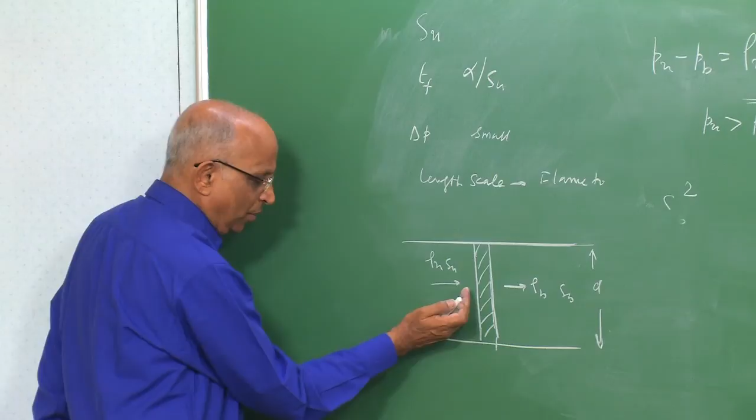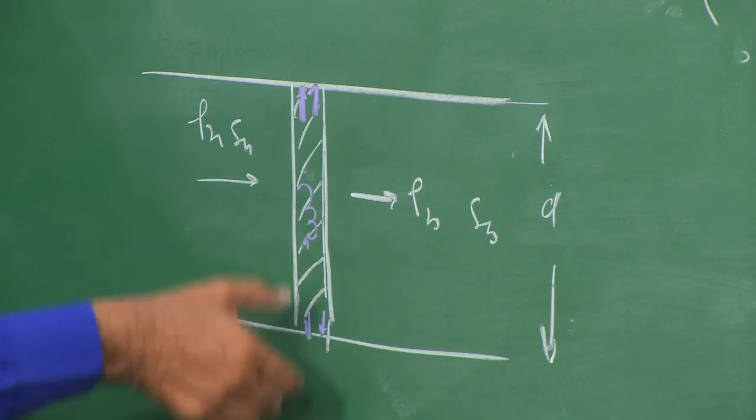I want to look at the flame structure. I have the walls of the pipe into which gases are moving towards the flame, which we treat as stationary, looking at the problem in the frame of reference of the flame. I want to see what heat is getting transferred from the flame to the wall, and what is getting generated. I want to find the diameter for which a flame is just able to propagate. Is there a diameter below which the flame cannot propagate, or by which the flame will get quenched? So I will take a look at the quenching distance or quenching diameter, and based on this, along with flame speeds, define the critical size of the ignition kernel.

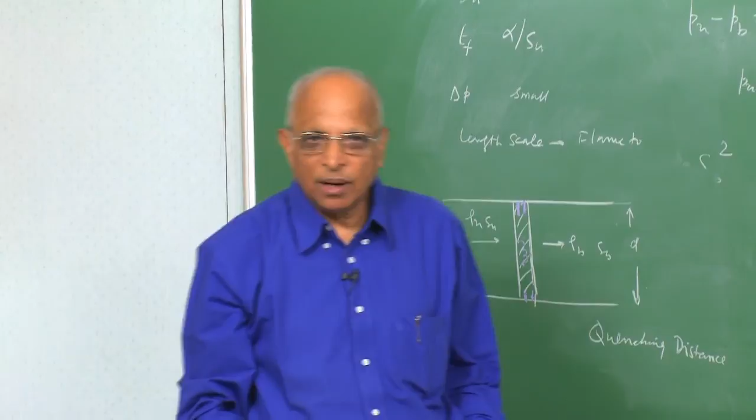I will follow this up in the next class. To review what we have done today: we relaxed the assumption of a lumped mass system. We looked at the ignition of a gas at a particular point, from which the flame or combustion wave propagates ahead. We now know how to estimate the speed at which the combustion wave propagates, the thickness of the flame, and that the pressure drop across the flame is extremely small, though there is a drop from the unburned towards the burnt side. Next class we will cover the quenching thickness, the quenching distance, and thereafter model the ignition. Thank you.